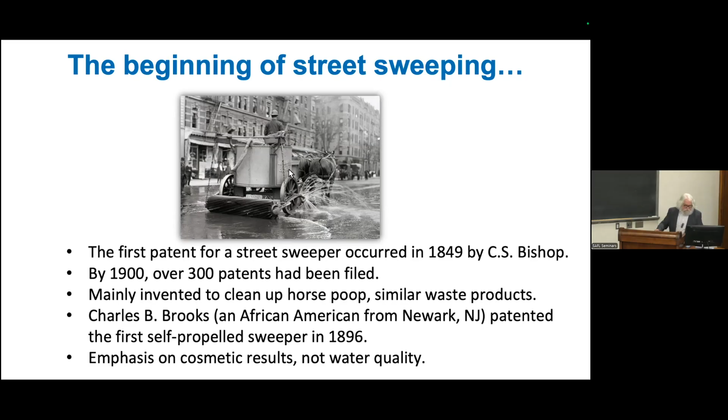We have known from the late 50s to the early 60s that stormwater is polluted. It was basically in this time frame that people all over the world were just getting a beaker of stormwater and doing a chemistry analysis on it, saying, oh my God, look what's in there. We've got sediment, we've got organics, we've got nutrients, we've got heavy metals, we've got toxics. This was going on, but the first comprehensive study of stormwater pollution occurred in 1969. It was funded by APWA, and they did the work themselves in Chicago. They determined through their work that the primary source of urban stormwater pollution is debris and contaminants from streets.

I guess I could use the pointer at this point, but I'm just going to read them for you. Contaminants from open land areas, publicly used chemicals, air deposited substances, ice control chemicals, and dirt and contaminants washed from vehicles. So that's a pretty long list.

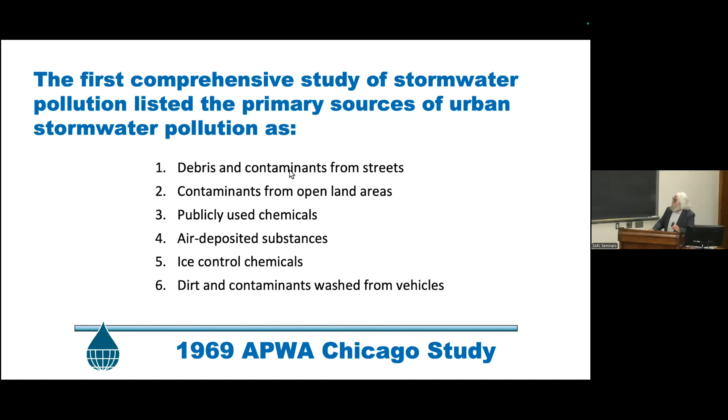But they also found that the most easily controllable source of pollutant is the debris and contaminant from streets. In addition, the study noted that the most significant component in terms of producing pollution through runoff was this dirt and dust fraction, which was really the fraction of about 1/8 of an inch or less. So you're talking 2,000 microns or less, and that is the definition of street dirt.

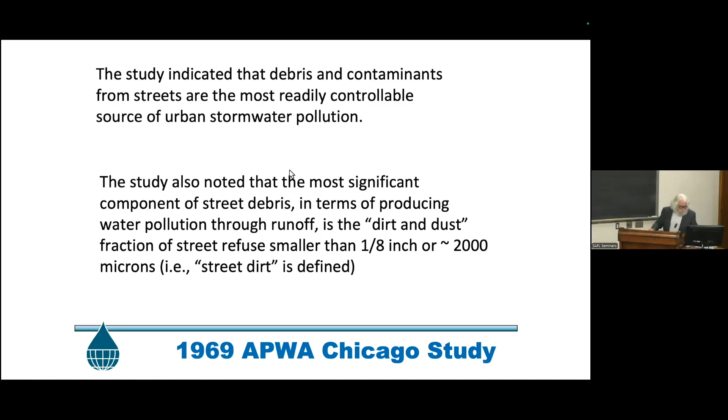Because of this study, EPA decided that we're finally going to spend some money and do our own study. So they came up with the resources and funded a study published in 1972 called Water Pollution Aspects of Street Surface Contaminants. What they did is they sampled street dirt, that dirt and dust fraction, at 8 different cities throughout the United States.

And they determined that street dirt is highly contaminated with runoff pollutants, so it's just not a Chicago thing. Most street dirt was inorganic mineral like sand and silt, and most of the pollution was associated with the fines.

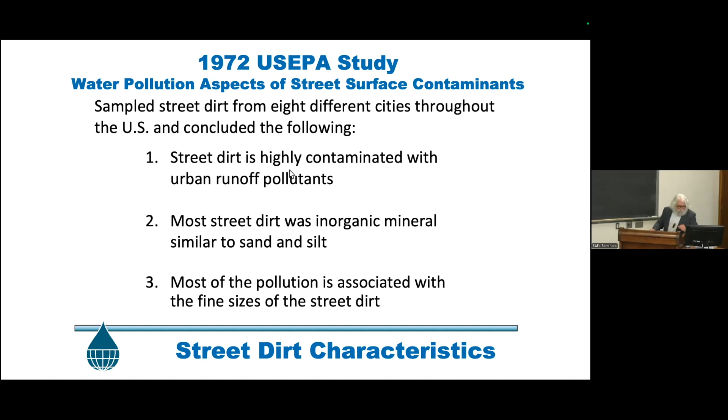Here's a table from that report. And if you look at solids, note that over half of the solids appear to be, let's say, call it 250, because 250 is a sieve we always use when we collect and sieve street dirt. So over half of the solids are there, but look at the pollutants. If you look at all the pollutants, and there's a list of them on the left there, notice that the amount of pollution associated with the 250 micron or less ranged from anywhere from 34 to 92%.

So, okay, let me set the stage for you. The year is 1973. I was not as, let's say, I was much better looking than I am now. But I just graduated from the University of Maryland in December. I immediately got a job, took a job at a consulting firm in Baltimore.

And also, for those that perhaps didn't realize, the Clean Water Act was passed in October of 1972. So in rather short order, I realized that I did not want to be designing storm sewer systems for the rest of my career. I knew I needed to go back to school.

So I contacted my professor I knew at the University of Maryland. I said, hey, I want to come back to school. You got any grants or any programs? He said, yeah, we got this 208 grant from the new Clean Water Act. You heard about the new Clean Water Act? I said, yeah, I actually have. And he says, sure, when do you think of starting? I said, I'm thinking about the fall term starting.

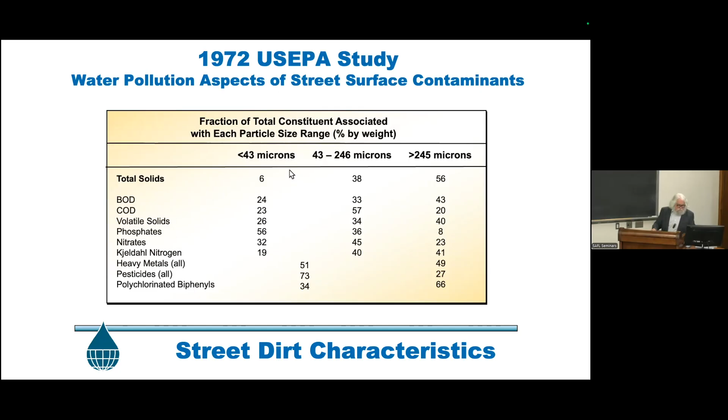Let's fast forward to 1982, though the work started in the 1980s. The EPA decided they really needed to start looking at what they could do to solve this problem—not just street sweeping, but all the other things that could help. Street sweeping was included, and I was involved in 2 of these 4 states.

They decided to study the effectiveness of street sweepers in reducing the event mean concentration, comparing a swept and an unswept basin. That could either be a paired basin, or a serial basin where I'd sweep it for a while and monitor it, then not sweep it for a while and monitor it. There were 10 sites, 5 pollutants, 50 site-pollutant opportunities, across 4 states: North Carolina, Illinois, Washington, and Wisconsin.

It was the unexplainable negative results in 2 sites in North Carolina and 1 in Wisconsin that gave us this statement that literally set us back, I'd estimate, at least 30, if not 40 years: 'Street sweeping is generally ineffective as a technique for improving the quality of urban runoff.'

They arrived at this conclusion despite the fact that the data showed EMC decreases in 34 of the 50 site-pollutant investigations—68% went down. But because they couldn't explain why the others didn't, they said, nah, we're not going to bother with it. And the last line is so important: 'statistically indeterminate' is the phrase. Those results have hampered sweeping's perceived BMP value for stormwater runoff pollution ever since.

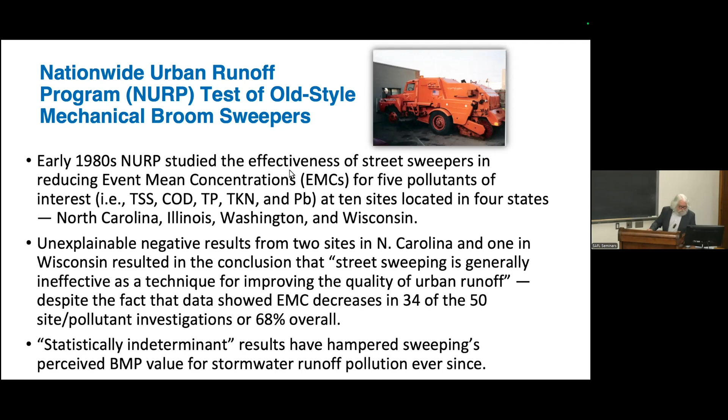But we now know—and when I say we, I mean I know, because I have a model that can simulate this—why that occurred. These EMC increases resulted from the fact that the street sweepers of that era could hardly pick up anything less than 2,000 microns. So what happened is the sweeper would go by and pick up all this material, but it would basically expose all of this other material available. It did pick up some of it, but very, very little.

Interestingly, where do the high intensity rainstorms occur, of those 4 states? North Carolina. There, 9 out of 10 pollutant site opportunities went negative—meaning the unswept was higher than the swept. Where are the low intensity storms? My neck of the woods, Bellevue, Washington. That's one of the projects I worked on with Bob Pitt.

Notice that 10 out of 10 there showed a decrease, or at least no change, in the EMC. And when you look at the Midwest, which is sort of in the middle in terms of rainfall intensity, they had 23 out of 30 times be a positive reduction—that's 77%. So my point is that we should have done a much better job looking at the data and realizing we were doing this for the first time.

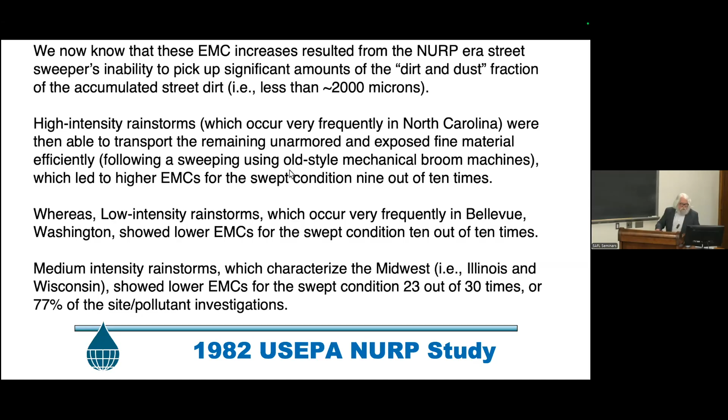So I want to talk about the good news. The good news is that the street sweepers of today, even the mechanical broom sweepers—we'll be chatting about the different types—have improved dramatically. In fact, I was contacted in 2008 by the Elgin Sweeper Corporation. They wanted me to test 4 of their machines, contacting me because I'd already done testing in Seattle, Portland, and Washington, D.C., so I already had 3 examples of this protocol I'd established.

So I said, fine, put a contract together. I have complete control—I mixed up the pixie dust, I brought it, I put it down, they swept it, I sucked it up, I took it with me. So there's no way they could impact those results. It was total transparency; that was the rule when I put it out there. This is going to be public information. Are you guys ready? Yes, we're ready.

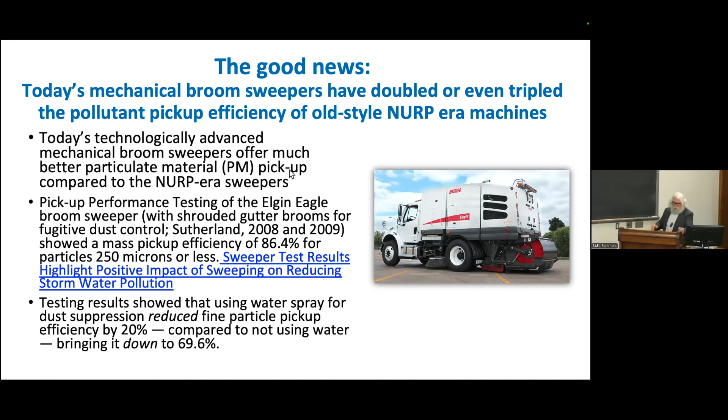However, we did test it with water, and in that condition, which was a parking lot in Illinois with an extruded curb and a tented structure, we found that water being used to reduce fugitive dust reduced it by 20%. So that was obviously a concern.

But here's the better news. Modern air sweepers that did not even exist—Tymco invented the first regenerative air sweeper commercially available about 1980, but it was not very popular, so it didn't really exist—have vastly increased the ability for us to pick up street dirt, especially fine material. When you look at the same study, the same length, you can see how well their regen did. And even their vacuum, which we tested, showed pickup performance of 90 to 95%, documented.

These are brand new machines, understand. Don't expect that's going to happen maybe on your first run through the route. Over time, it's going to be less, and we know that because I've done more testing since this, obviously.

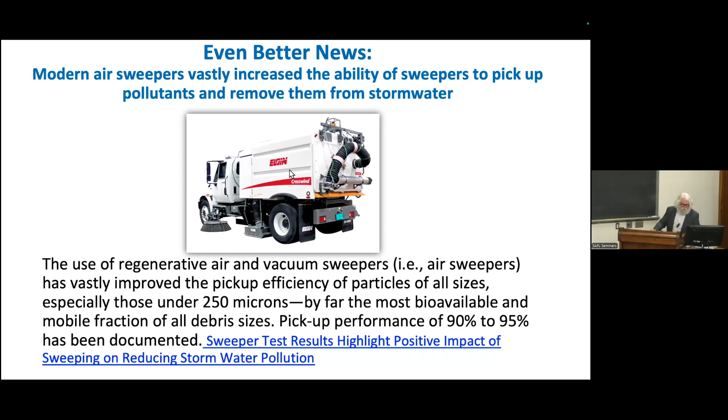So let's fast forward to the year 2010. Now remember, I've got a computer model. I've been running studies, Livonia Michigan, Jackson Michigan. I'm doing work back in Portland. I'm doing work up in Seattle. I'm doing work down in the Southwest in Arizona. And I am so excited when I see San Diego release this targeted aggressive street sweeping pilot in the year 2010.

And you know what? He said, we're going to do something different. We're not going to use an automatic sampler. We're going to identify 3 sites that are identical as far as we're concerned, same neighborhood, next block over. We're going to leave one unswept, which was a little bit of a problem because the residents want to know why their street wasn't being swept. We're going to use a mechanical on the second one and then a vacuum, a broom machine, and they captured 3 storms.

And here's the results, because they sampled that water as it left the gutter, as it was flowing into the catch basin, by hand. And they went through the analysis, and look at the results: TSS reduced by 74% by mechanical broom, 85% by the vacuum. Reduction for metals, which was of great interest, as you can see in this table, as high as 60%, up to 83% for the vacuum.

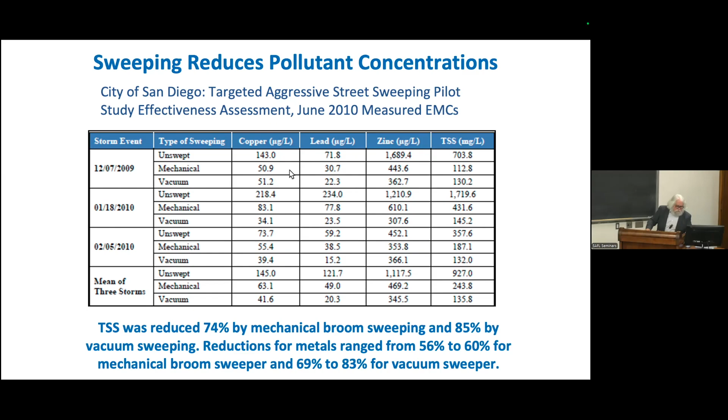This is the game changer, when John Sansalone decided to get involved in it. I've been pestering him for years to finally get involved in this. Studies by the University of Florida over a 12-year period, in association with the Florida Stormwater Association, involving 12 to 14 MS4s, found street sweeping was the best BMP—up to almost 7 times more cost effective than the next best BMP for total nitrogen and total phosphorus recovery.

Why? How did he get to this conclusion? He said, listen, I'm not going to go sample stormwater—it's almost a fool's errand. And that's what the late great Dr. Gary Minton said. I want to look at the things that MS4s are doing to remove pollution from stormwater, and I want to find out how much pollution they have removed from stormwater. If they pick it up, they've removed it. Now, you could argue that point, but that's the way he approached it.

And then I'm going to calculate the mass of the various pollutants, with the focus being on these nutrients, because Florida's got to focus on nutrients just as much as Minnesota does. And then I'm going to calculate the cost of capturing a pound of it. And by the way, street sweeping was the lowest cost per pound. Catch basin cleaning was second in all instances.

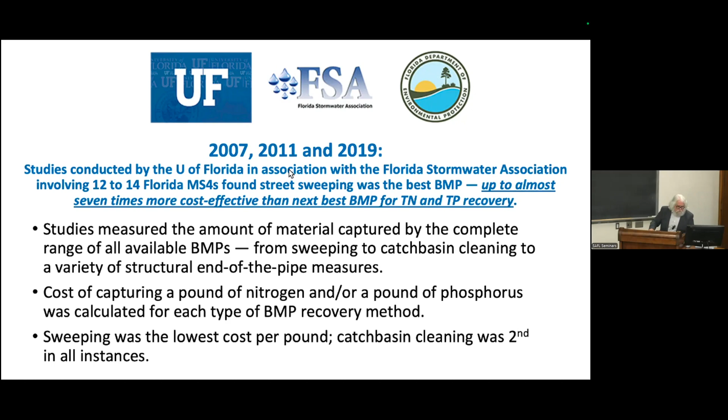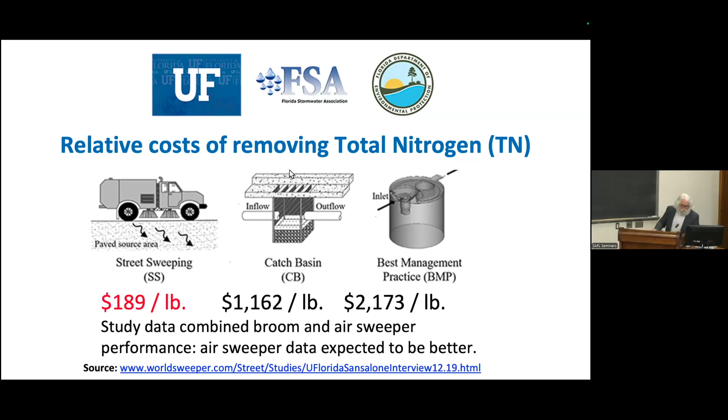And here's the numbers for nitrogen. I'm not going to spend too much time on that. The difference between number 1 and number 2 is like 6.5 times more. If I look at the median of all the various in-pipe type technologies that he was evaluating, that difference is about 11 times. Let's go to phosphorus. Phosphorus is a lot more expensive, but the difference between number 1 and number 2 is almost 7 times.

It's just a shade under it. But look at the difference between number 1 and the median of everything else. It's like 40 times more expensive.

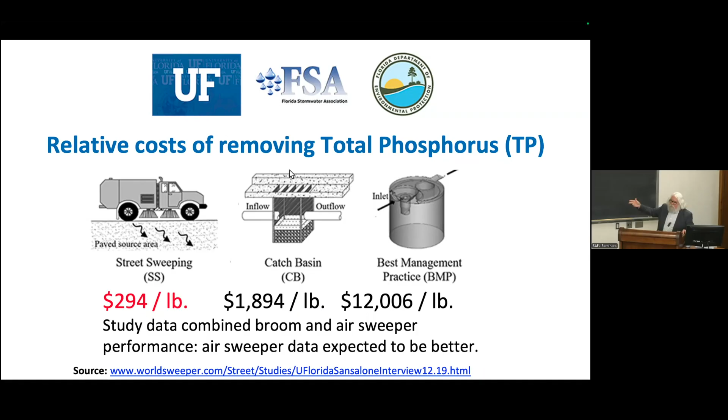So what can we say? Well, as John said, recovery of particulate material matters, and that proves that picking up street dirt matters as well. They found that street sweeping was the most economical and dominant practice that MS4s could implement and optimize in order to maximize nutrient and particulate material recovery.

Now, they did this study and they didn't even separate the MS4s that were using broom sweepers versus air sweepers. I'm telling you, we asked John, what would it take to go back and do that? And he said, it wouldn't take much, but I don't have it now. In other words, if the money were available, he'll go back to that data set and show you the difference, and that the air machines will pop even more.

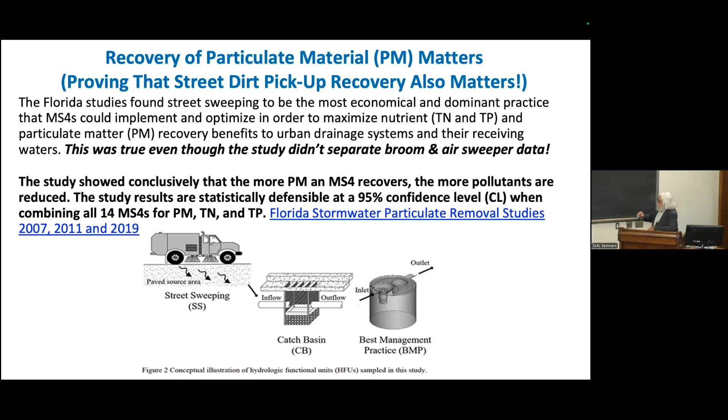The study showed conclusively that the more an MS4 recovers, the more pollutants they reduce, and here's the statement I was waiting a lifetime to be able to read to you: the study results are statistically defensible at a 95% confidence level when combining all 14 MS4s for PM, TN, and TP. There's a link to an article about the studies in World Sweeper, and the study itself can be found there too.

So finally, we're going to get to the topic. I'm going to be moving quickly, but hopefully covering a lot of information. So if you want to maximize the environmental value of your street sweeping program, make it an enhanced street sweeping program.

An enhanced street sweeping program is specifically designed to focus on the maximum reduction of pollutants and microplastics traditionally found in stormwater runoff, such as organics, nutrients, heavy metals, toxics, and particulate material, or TSS. By the way, the last two can become airborne and then create problems from an air quality standpoint.

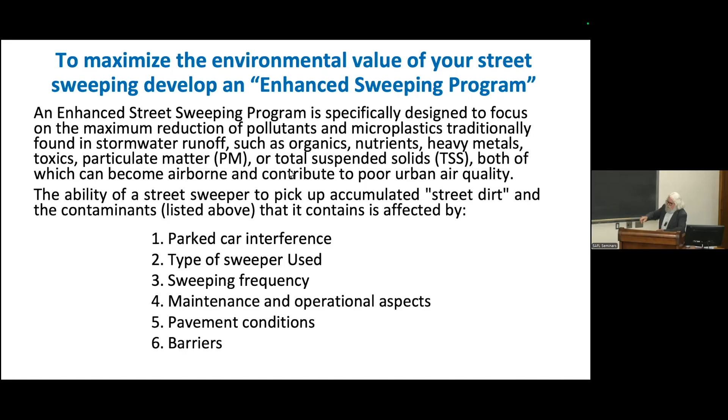Parked car interference is number 1. Period. End of story. You want to be enhanced? You want the enhanced label? You have to move the cars.

Interesting, in our conversation at dinner last night when I went to the panelists, Randy pointed out that in this area, you're used to having to move your car, but it's for a snowplow. So maybe from a political standpoint, this won't be a very difficult sell.

And I'll show you why in a minute. Remember, 1 single parked car equals 3 vehicle lengths. The street sweeper comes away from the curb, goes by it, then goes back to the curb. That's 1 equals 3.

But wait a minute, Roger. What if there's 2 parked cars right next to you? Oh, okay, so 2 equals 4. No, what if they're 1 car length apart, 2 equals 5? What if they're 2 car lengths apart? 2 equals 6? What if they're 3 car lengths apart?

What operator do you know is going to pull away from the curb, go by, and risk taking 2 side view mirrors off just to sweep 1 curb length? No one. So really, 2 cars could equal 7. You put a bunch of them together and you didn't sweep a thing.

So that's why it's so important that we recognize that we have to remove parked cars. And if you have a program where you're not removing them, and you do have parking densities that are impeding your sweeping, that's important too. If everyone's got a driveway and they're not parking on the street, it's okay, you don't have to move them, you don't have to put them through that.

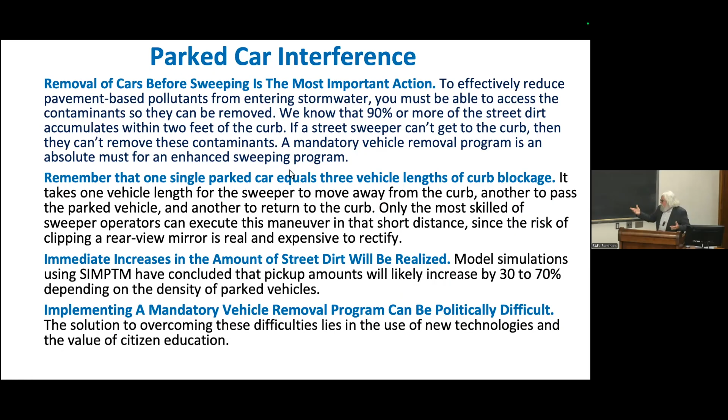But the reality is, if you do remove parked cars, you're going to see a 30 to 70% increase in the amount of material that you're picking up, just like that. And you say, well, implementing a program like that can be very difficult, and I understand. So what you need is a citizen-friendly car removal program.

Thank God for technology. Technology changes everything. We already have phone computer apps, mobile applications that say, oh crap, I gotta move my car today. And that app can say, oh wow, they're not going to sweep today because the sweeper's down, I don't have to move my car. We already have GPS apps that can say, I can go online and see where all the sweepers are.

Unfortunately, the part we're missing is knowing where they're going. Just because you can see the sweeper, unless you know the route, we haven't linked that together yet, but it's on its way. If we can do that, we can say, hey, you don't have to move it for 4 hours. You can literally move it, run an errand, get a notification when it's a mile out, drive around the block, do whatever you need to do, and put your car right back. It won't be that much of an inconvenience.

That makes it a much easier sell to people. Explain to them how contaminated this stuff is.

And then what's most important is the ticketing. You have to do this in combination with a ticketing program. Put that iPhone 17 mounted on the dashboard of that street sweeper. Believe me, that technology already exists. It'll read that license plate. There's no question you just obstructed my street sweeper and you're going to get a ticket, and you can send that information directly to the department. So unfortunately, I just eliminated the parking enforcement job for this function. But hey, that's just how it is.

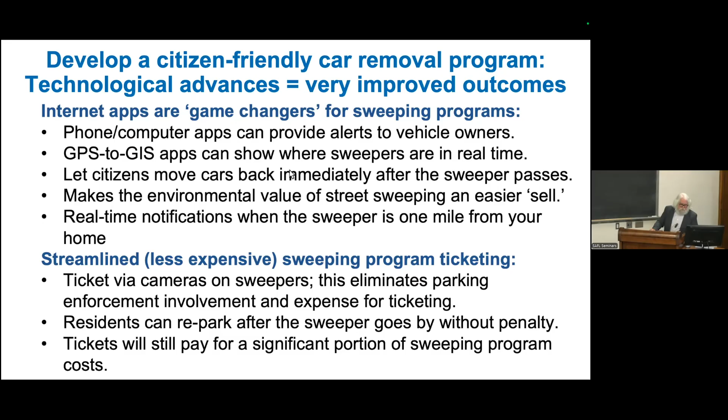And the bottom line, we don't like to talk about the bottom line, but it's real. The difference can be like 30 to 50% of your program. You put this in, we don't know if we did all of this, whether that number would go down, but that's how much revenue you can generate from tickets, even if you're doing a lot of things. At least we believe it'll be the low end of that number and not the high end, for 30 to 50. So let's just talk for a moment on sweepers.

Oh, my goodness, I almost missed this, Maggie.

Remember, citizen education minimizes citizen friction. Educate your citizens about sweeping and pollutant removal value. Have touch-a-truck events, handouts, web pages. Develop grade-specific education modules for schools, this one's so important. Have the children teach the parents. And how about naming contests for new sweepers? Sweeps a lot is the best I've ever heard.

Understand, 1 parked car equals 3, but 2 parked cars could end up more like 4 to 7. Multiple cars parked on a block randomly means no sweeping gets done, and the areas left unswept are very unsightly and unhealthy, and obvious too. If you've seen cars that are there forever, it just accumulates everything. So maximize it and get the vehicles out of the way.

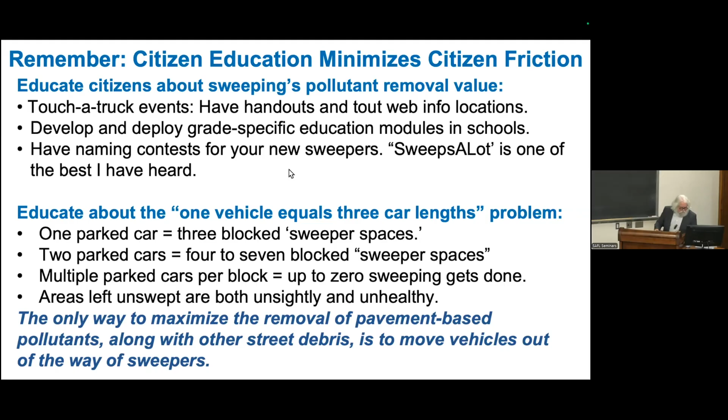Now we're going to talk about... did I miss a slide? No, I might have. No, okay, yeah, sweeper, my bad.

Let's talk about sweeper types. This one's pretty busy. We have mechanical broom sweepers, that's a main broom churning across the machine, throwing the material onto a conveyor belt that goes to the hopper. Don't confuse that broom with the gutter broom, the gutter broom is required for every sweeper. An air machine has to throw the material in front of the air, the regen, so that's very important.

If you want an enhanced sweeping program, unless you're running a tandem operation - there's a link to a tandem sweeping study we evaluated in the late 1990s, that is the best sweeping operation, but it costs twice the amount of equipment - put that mechanical out front and put the air machine right behind it, and you'll be amazed at how effective you become, approaching 90%, even with older machines, because of what's happening to the particle size distribution of the material.

Vacuum sweepers are recommended, but understand a vacuum sweeper is exhausting air continuously, so it can generate a lot more fugitive dust, which might be a concern. But I have to tell you, in the testing we did in Los Angeles about 3 weeks ago, we had 2 vacuums, one the RAVO and one the Scarab, both Fayat machines manufactured in Europe. They did a much better job on fugitive dust compared to some others, and we know that because we were monitoring fugitive dust generation. So we recommend them, but the highly recommended type is the regenerative air, because it regenerates the air and only exhausts a very small fraction of it.

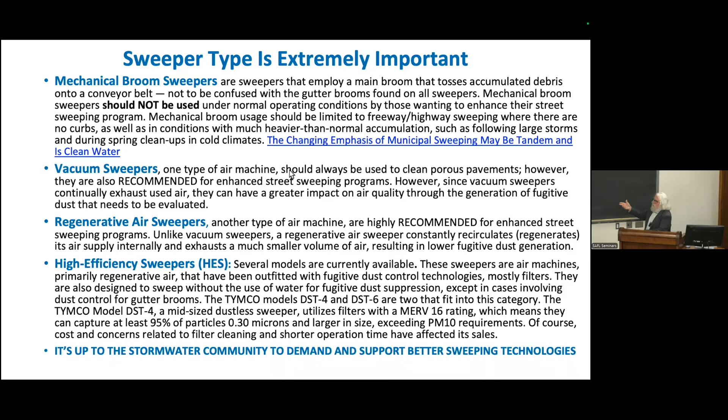So you don't have that issue, and we've found it to be slightly more effective than the vacuum. And then I got another one down there - what the hell is that one? Well, that's another term I made up: high efficiency sweepers. I want people to realize we're not done. We need to figure out, to give the mechanical engineers something to do, how we can remove that fugitive dust so it isn't going down in a cloud of dust, or generating it. A lot of times it can be water on the gutter broom, or shrouding the gutter broom. That can work.

But I wanted to focus on two of them, both TYMCO, the inventor of regenerative air. They have a DST-4 and a DST-6. These have been purchased at places dealing with very fine material, like cement factories. Very effective, but there's an issue - it's related to the filters and how long you can sweep. So we're not there yet necessarily for residential sweeping, and the cost is much more expensive than even the regen, maybe a 50% kicker. So that's the issue. But it's up to the stormwater community to demand and support better sweeping technology when they meet that demand.

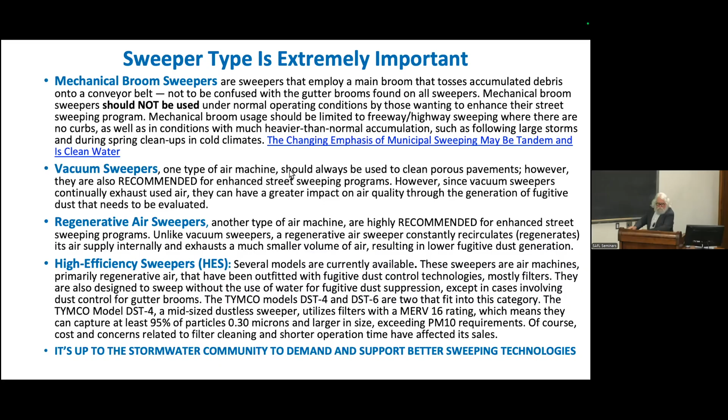Let's get rid of the mechanical machines, unless we want to operate them tandemly. So let's talk about operation and maintenance. There's a lot of things, you see what I'm saying? Your MS4 permit says sweep? What, are you kidding me? Tell me something, give me a guideline, tell me what I'm supposed to do. And that's what we're missing. But I think we're working on that being different in the future.

Maintain the equipment - it's simple, you just have to maintain it. You can't afford not to maintain it. Forward speed is really important. I always thought if we go as fast as 8 to 10, it's going to be horrible - that hasn't turned out to be the case, but not always. The data we just collected in LA kind of went the other way. It looked like you can go faster than go slow, but that was because of operator error. In any case, if we're only losing 10 or 15% pickup going faster, but I can cover twice as much, did I remove more pollution in a day? Yes. So these are the things you have to be looking at.

You've got to be looking at frequency. The most important thing about frequency is that it fits the accumulation. As I'll show you in a minute, you better try to figure out what the accumulation is so it can fit it. And then there are times, like when leaf drop happens, where you have to be really aggressive.

The thing is, don't sweep - I don't want you sweeping a downtown area daily, and I don't want you sweeping it biweekly either. Why would you just throw your money away? You're using a 300,000 plus piece of equipment to pick up McDonald's cups. The accumulation over one week, even in the downtown corridor, isn't going to be worth it. If you really think it's a problem, hire some at-risk youth, give them a job - that's what they did in the old days, rolled around a cart and picked all this stuff up by hand. That's cheaper, believe me, than running a sweeper. Free that up for your residential sweeping, or your industrial, commercial, or major arterials, to be honest with you.

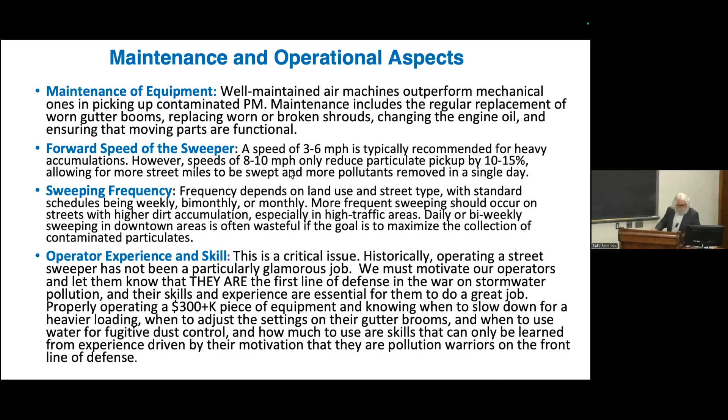The last item in that long list was pavement condition and barriers. Street sweepers have difficulty picking up street dirt on pavements classified as poor or fair, due to the cracks and deep depressions where dirt can accumulate. Uneven surfaces are hard, especially for air machines. It loses suction on the regen—it's got it there, blows the air down, tries to cross the head, sucks it up on the other side. If it's uneven, it's like a vacuum—you're vacuuming, but it doesn't do as good a job.

So what I'm saying is support repaving projects. Understand that when they repave a street, the water quality coming off of that is greatly improved. Bob Pitt proved that in 1987—read his doctoral thesis.

That's why I've tried to get research from highway people. I said we should do a study to show the value of this repaving. People wouldn't necessarily oppose them just because they're expensive. And then here's the most important thing.

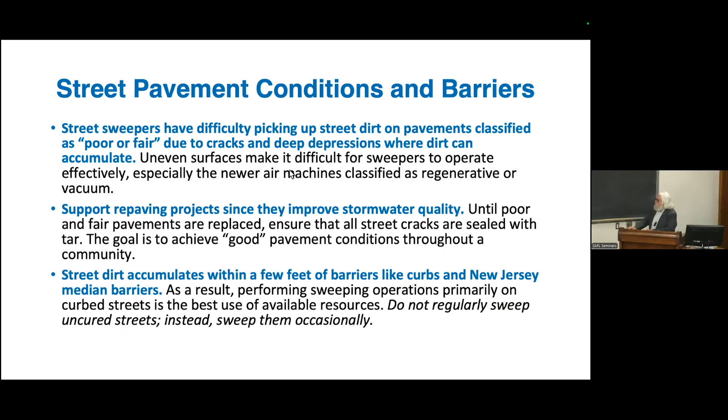We know street dirt accumulates very close to barriers, curbs, New Jersey barriers. If there is no barrier, don't sweep that on a regular basis. Now, I know politically you've got to sweep it every once in a while—okay, sweep it every once in a while. But the point is I'm actually spending too much time on all of this, so we're going to have to really move.

Okay, you want to do some things? You really want to find out what's happening? Street dirt accumulation monitoring—Bob Pitt taught me in Reno, Nevada in 1980 how to do that. This is happening in Los Angeles, California right now with a brand new study just starting up. So go out there, find your street dirt. There's a link to a presentation that talks about that technique.

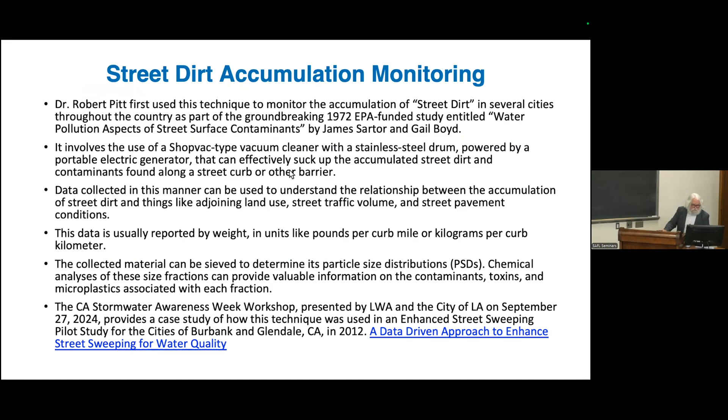It's not that hard. The equipment doesn't cost that much—it's the manpower you have to provide. How about... I'm sorry, the streets, did I miss one? No, I didn't. Oh yeah, okay.

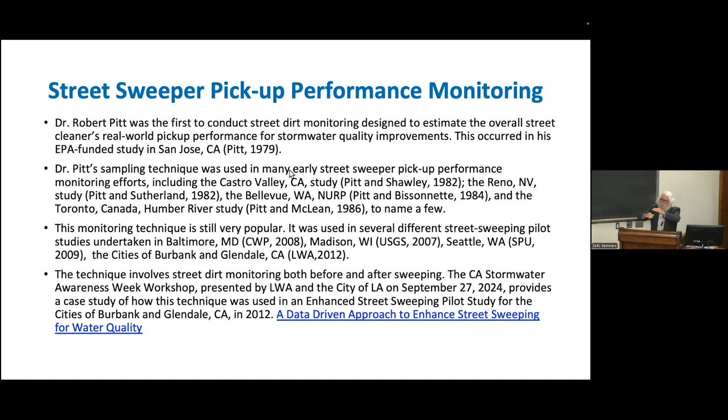Street sweeper pickup performance—in other words, this is in situ. You're doing random sampling like you're monitoring street dirt, but you're out there just before you know they're going to sweep. You do your random sampling, then you go out the day after they sweep and do your random sampling. Can you see a difference from your existing operation? Is it making a difference? It's important to know that.

Because if it isn't, then you might want to consider testing the pickup performance of the street sweepers you currently have, using this type of procedure—a test procedure that you would go through. Those are the various steps. So this is where I'm telling you, I've got a lot of information, but you can see I'm obviously not going to be able to cover it all.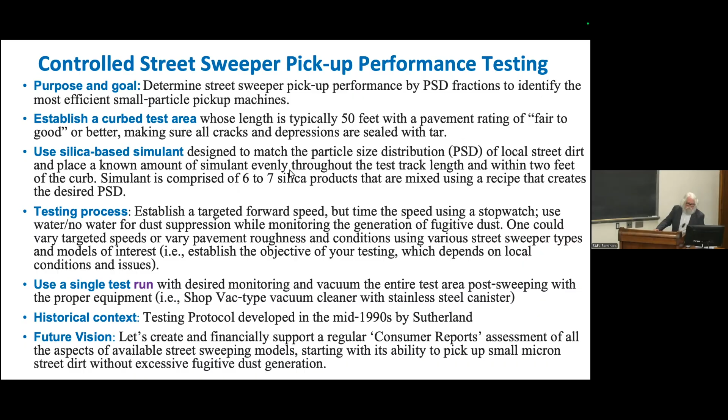There are some links for pickup performance testing. The Elgin work I told you about—again, Los Angeles, 2 years ago—tested 2 machines and showed the mechanical was 35%, regenerative air was 75%.

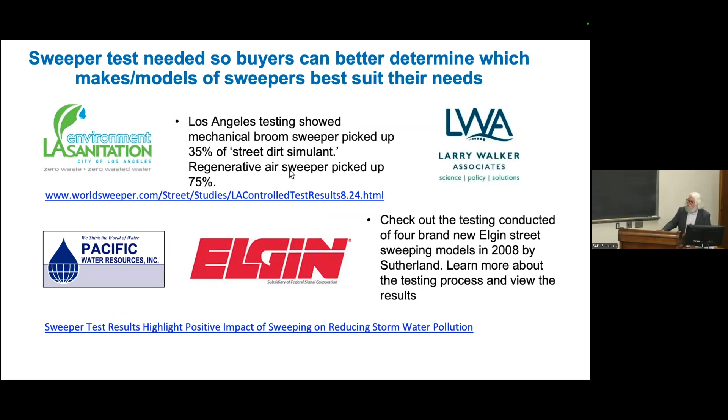So I want to give a shout out to Jill Murray, who called me a couple years ago and said, 'Oh my God, this project—I'm retired, I'm not, okay, I'll put it.' So the city of Santa Barbara got a Sea Grant from NOAA to investigate microplastics, and I'm working with the University of California at Santa Barbara. Professor Patricia Holden is the contact you would want to talk to.

And we did some street sweeper testing—there's the link, we just completed that. The whole purpose of this was, for the first time anywhere in the world, we scientifically placed 5 different types of microplastics into the street dirt simulant that was created with my recipe. Now we made 14 runs of 6 different sweepers, so we have this data. I can't show you any of the data right now because that's a whole different presentation.

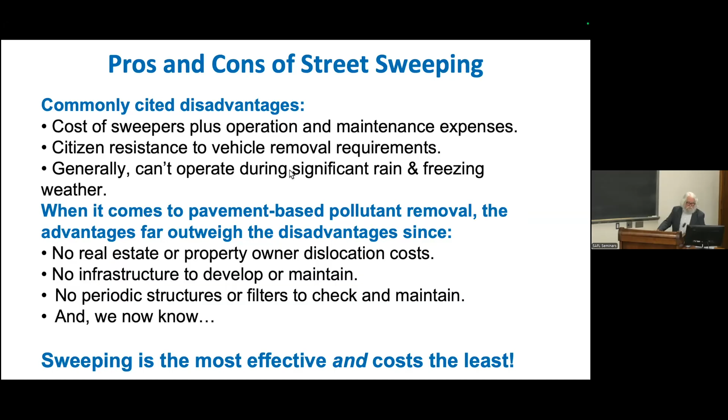But here's the pros and cons of street sweeping. You can see there's disadvantages, but hopefully we've covered those. We really need to focus on the fact that sweeping is the most effective, and it costs the least. I need to read this to you because it's so important: with conventional BMPs—this is Dr. John Sansalone, University of Florida—particulate material removal costs range anywhere from $4 to $41 per pound.

For street sweeping, the cost for removing a pound of particulate was 10 cents. That is really the only thing people need to know.

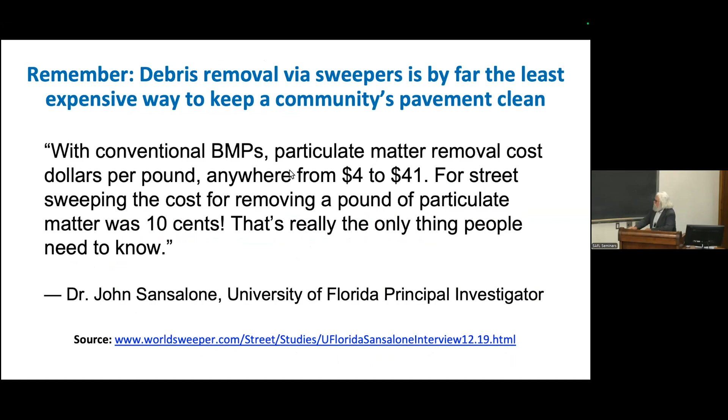There's some other things, making a plug from the model. I'm retired from using the model, but Seth Jelen is 13 years younger than me. He works at WSP, which is actually a Canadian firm, but they have offices all over the country. So if you're really interested in doing this right, it's not going to cost that much to get the data that you need.

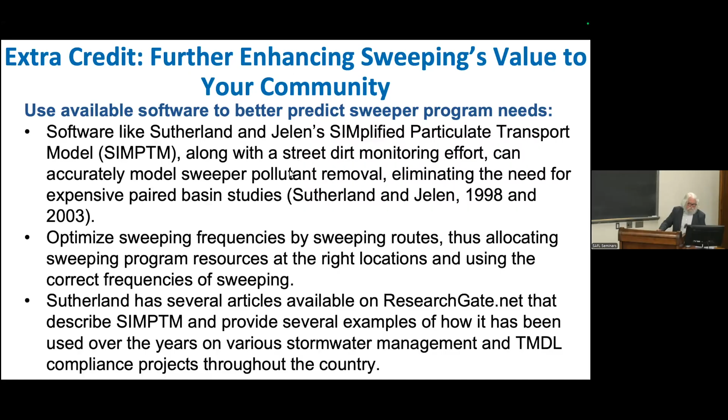And here's the last thing. I shout out to Ranger, so many of these slides are from Ranger, by the way. Forgot to mention that. But make the sweeper the eyes of your community. The technology is going to happen if it hasn't happened already. Oregon City mapped the potholes in town using their street sweeper because they drive these routes every day.

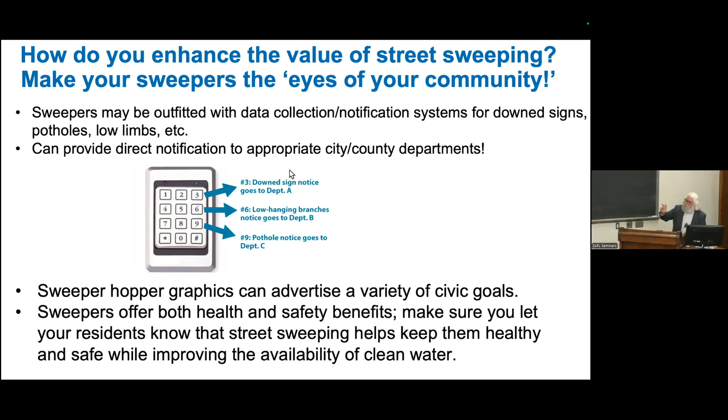And so make sure, if this is something you're interested in, go for it, learn more about it. What is it you want to see? Abandoned vehicles, downed tree limbs, all kinds of things. It can become the source. Instead of driving a guy around in a pickup, the street sweeper with a camera looking for this stuff can get that information. And here's my shout out to Minnesota. There's the link where you can hear the interview with Mike Trojan, who's in the audience, and also Randy, who's going to be talking on the panel.

And I, in my defense, when I first learned to pick up street dirt, I asked Bob Pitt, I said, what are we doing with this organic material? And he goes, nah, we don't analyze that. And I go, why not? And he says, because a street sweeper will pick it up. I've never seen organic matter a street sweeper won't pick up. And so that means from the very beginning, we were focused on one thing. That's important to know.

But obviously, down the road, it became quite obvious that it can be a tremendous source. And as Mike points out in that interview, it's not just the leaves, it's not the TP, it's the dissolved phosphorus that is not becoming dissolved phosphorus because you picked up the leaf. Very important, there's a link to that. So shout out to Minnesota.

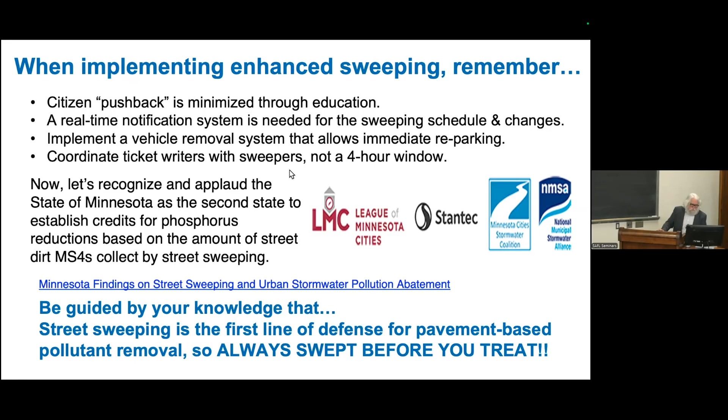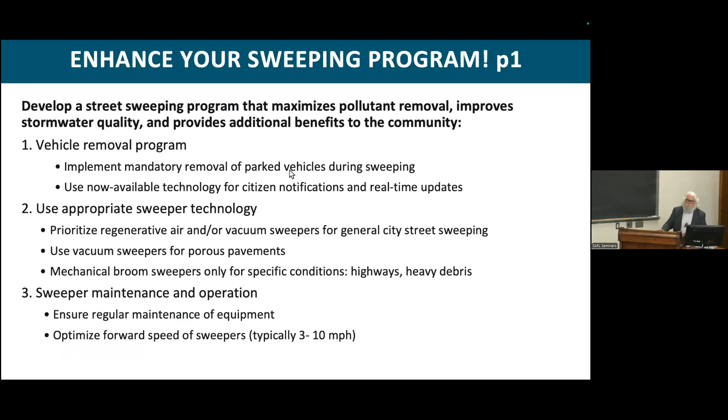And at this point in time, I'm going to turn it over. I'm going to slowly scroll through these slides so you can see it online, and then you can stop it and look at it. But Ranger Kidwell Ross was kind enough to put this together. You want to know what an enhanced street sweeping program is? These are the things that you do. What we have is like a CRS for street sweeping.

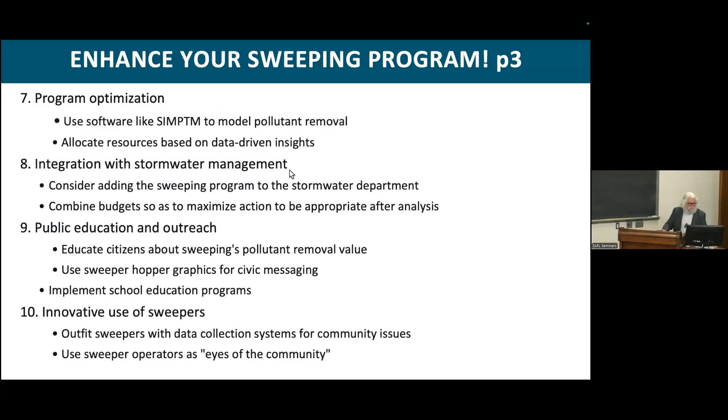If you get already to number 10, you'll give you a, how many gold stars, Randy? I don't know, any case, there's a link to his webpage. And believe it or not, Andy, I'm done.

Thank you, Roger. Yes, let's take some questions. Yes, Mike Trojan. Yes. Come on, make it an easy one.

Here in Minnesota, where we have a fall leaf drop followed by frozen soils for several months, we're finding a lot of phosphorus in spring runoff. What are your thoughts about encouraging citizens to sweep their leaves into the street during the fall leaf drop?

Well, that's a softball, thank you. That's exactly what the city of Portland's been doing for decades. As you know, they're the inventor of leaf compost, and they needed leaves, and they needed the community to participate. So they said, hey, let's sweep the leaves, just sweep your leaves into the street, but leave a channel for the runoff, because we won't be able to get to everyone's leaves on day one, but we're gonna do this over a 2-week period. So make sure there's a channel, and if there's not a channel there, someone will knock on your door and leave you a ticket. So that's what they've been doing. I don't know how many tickets they've left, but that's what they're doing.